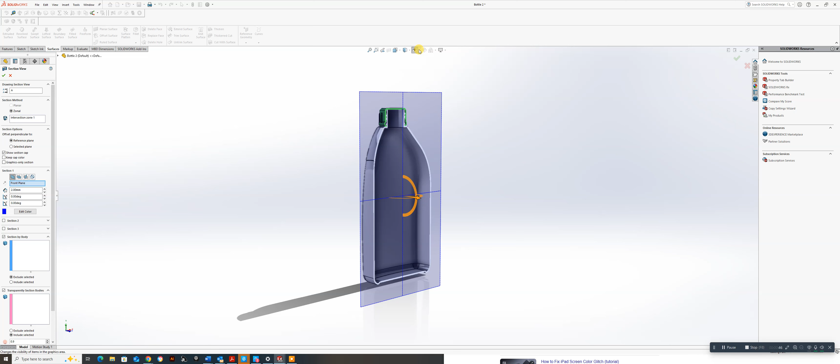Okay, let's just take that one off. Sorry, I want to take that off there. So how do we do this? Right, I'm going to start a new drawing. So just to demonstrate this, if I go to File, New, Part, and OK, so we can keep going back to this one to get sizes and stuff.

So as with everything, go to Sketch, Sketch, and I'm going to do this on the top plane. So I'm actually looking down on this, and the first thing I want to do is put a centre line in, around that origin, so from there to about there, and it should lock into that point there, which it has. And I'm going to put one up from about there to there.

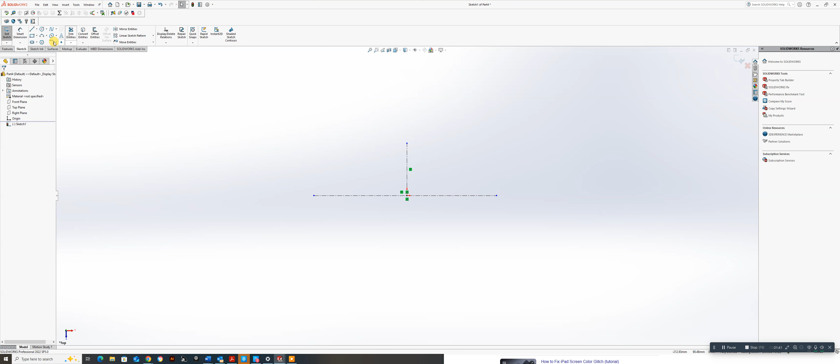Now I know what the distance right across is, it's 115, so I'm just going to put a smart dimension in for that line. Okay, and put 115. And this one here is 60 across, so I'm going to make this one 30. Not far off at all.

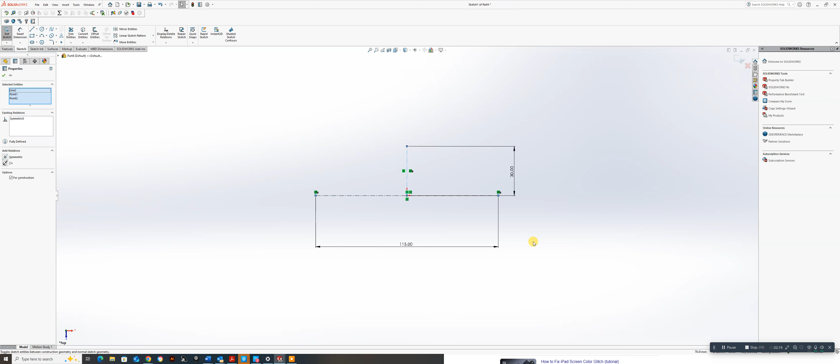Now what I need to do is select that little dot there, hold the control key down, select the centre - not the centre dot, come off that one. So we'll start again - that one there, centre line, and that end one, and then let's make those a symmetric condition. You see that move in. I don't need to worry about that one because of the other side.

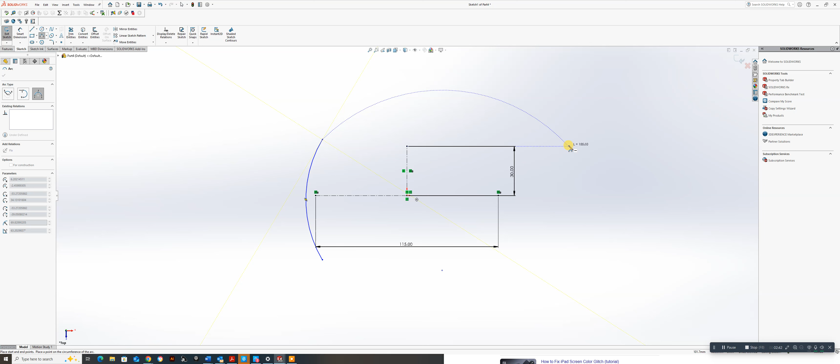So what I'm going to do now is go to my arc tool. I'm still in the sketch tool, I'm going to go to my arc tool. I'm just going to roughly do an arc from there to there and about there, and I'm going to do one from about there to over there and down to about there.

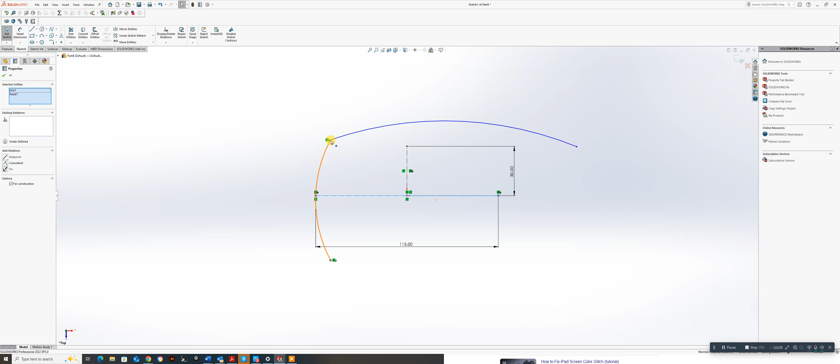So I'm going to make this one here, hold the shift key down and make those vertical together. They should be in line, and I'm going to bring that in and snap it to that point there, so it's on there. I should actually make these symmetrical - control key, do that, and there we got symmetrical there.

And then I want to bring this one in a little bit there. Let's bring this right down to here. Do that, let's make that. Oh no, Control Z - let's just bring this down here for a sec. That might help a little bit.

Let's see if I can bring this down to about there. And let's see if I can snap this one in too. Yes, I can - do that one there, coincident. There we go.

I'll bring this down a bit more. Right, I'm going to do that one and that one, I'm going to make those horizontal. It's changed everything - let's see if I can get out of this. Let's just pull that back a bit so it goes back to about there.

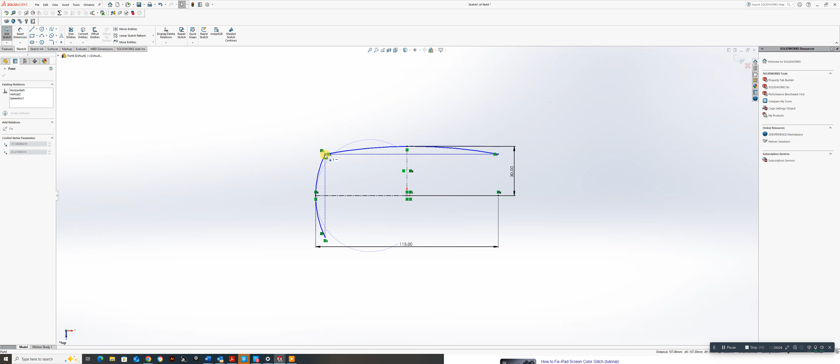That's perfect. And I'm going to mirror, or what I should do is make those symmetrical as well. That one, hold that there and there, make those two symmetric. Okay, we're now getting somewhere.

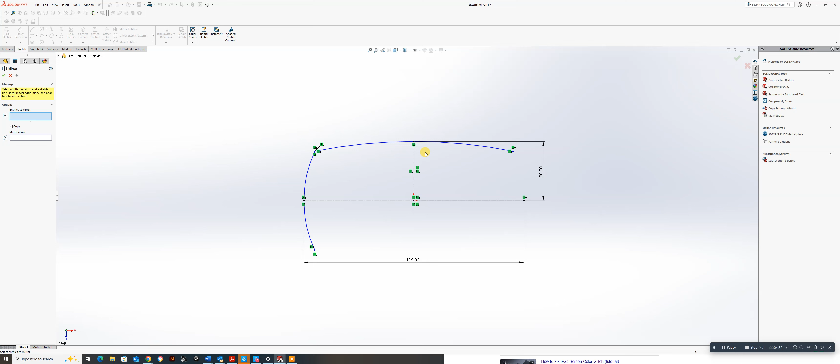And then I'm going to mirror, and notice I haven't put any dimensions on quite yet. I'm going to mirror that entity about there. Perfect, so just get that tick, and I'm going to do exactly the same again for the other aspect.

So mirror entities - I'm going to select that one there and do this one here. Sorry, no, I've done that wrong. Take that one out and put that one in there.

So I now have the bases of my bottle, but there are no dimensions strictly on there, so let's do that. Smart dimension, and this is a radius for this curve. Now that says 57, it should be a 112 radius. So let's just see what happens here.

It might have clicked on, so let's just try and change that to 112. Okay, that really does throw everything out. And let's bring this one in, see if I can put it down. No, I've done something really drastic there.

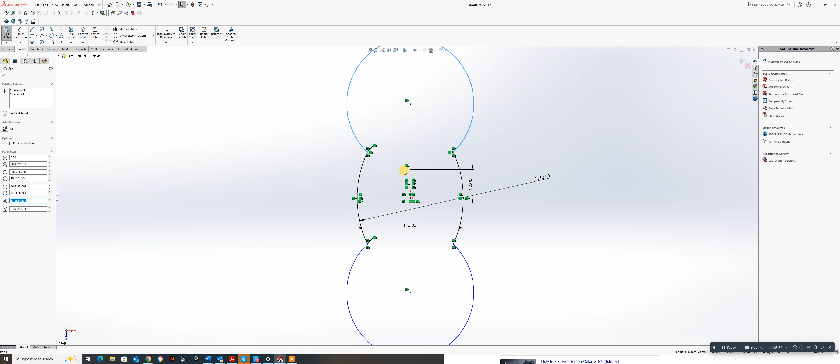So it's Control Z that - this is what it's about, it's trying to get yourself out of problems. I think it's because that has done itself in, so let's just do that first. Let's do this top one first. Smart dimensions, that one there. That's better. And let's do that one at 300.

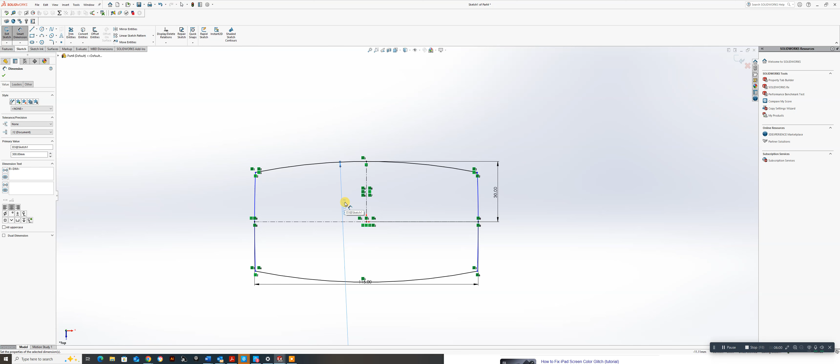Okay, all I need to do is now try and bring this in a little bit. So we've got a tiny curve. Let's go smart dimension again. Let's do that one, that's better, and do 112. There we go, far better. So I now have that.

And I need to do fillets on this side, so let's do those at 10mm. Let's go to my fillet tool, which is there on the sketch, 10mm. That looks about right. Go around, do all these.

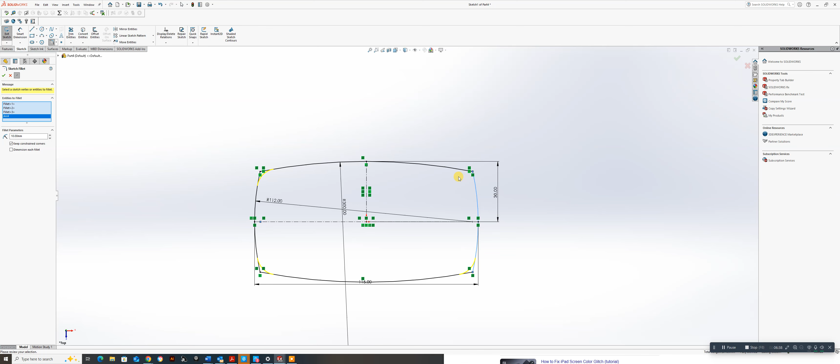And now I have the bases, the actual base of the bottle. If I just do that up there for that. Now what we need to do, if I bring back on the planes, I don't need to actually do the planes on that. Let me just agree to this. So up there, so I now have that sketch.

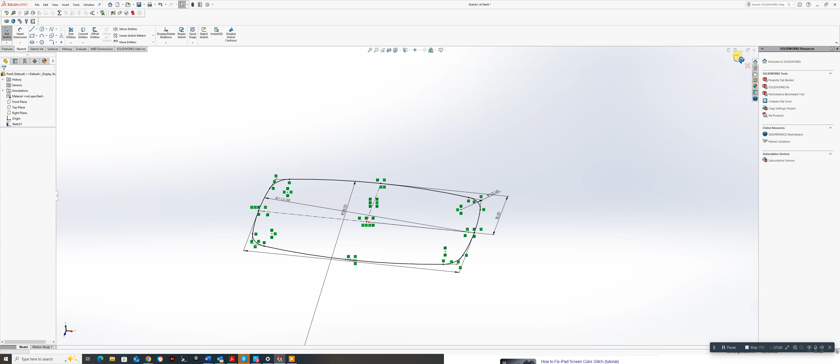Now I want to do another sketch further up. So if I go to features, reference geometry, then plane, and this time I want it 120 off this plane here.

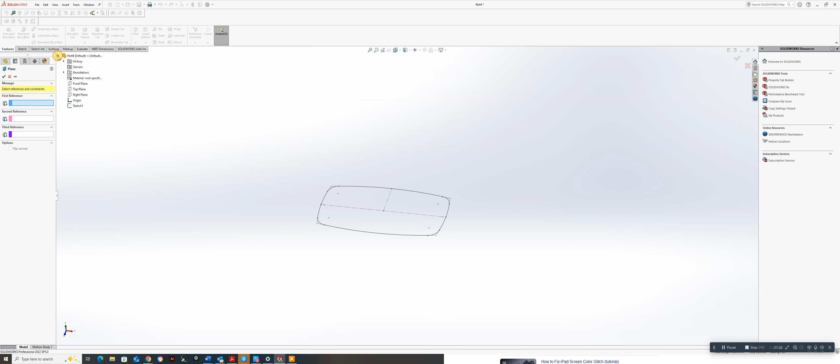So I need my reference geometry. Now rather than go up and switch my planes on, I'm going to do it from here. If I just hover over the front plane, I don't want that one. I go to top plane, and just show you the recent, the right plane. Go to top plane, and you see default was 10. I want that to be 120. Okay, let's give that a green tick.

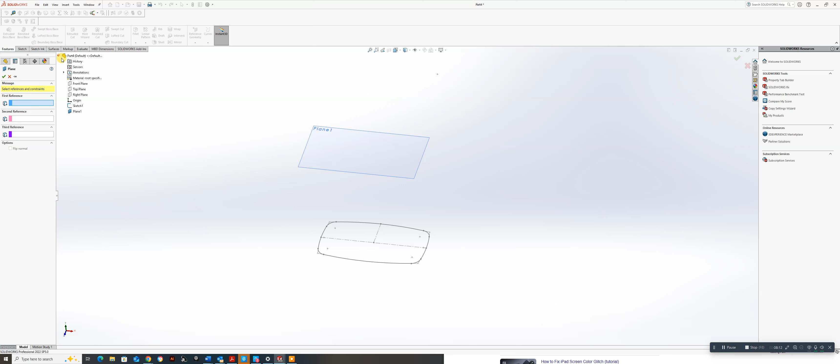And while we're here, I might as well do the next one as well. Put my planes in, I'll put another plane in, so just go to features. This is for the top of the bottle. Plane, and this one is not off that one, I'll do it from the base again, from top plane. Okay, and this time that should be 210. I could have done the maths, but I'm just a little bit lazy in that way. So just give that green tick.

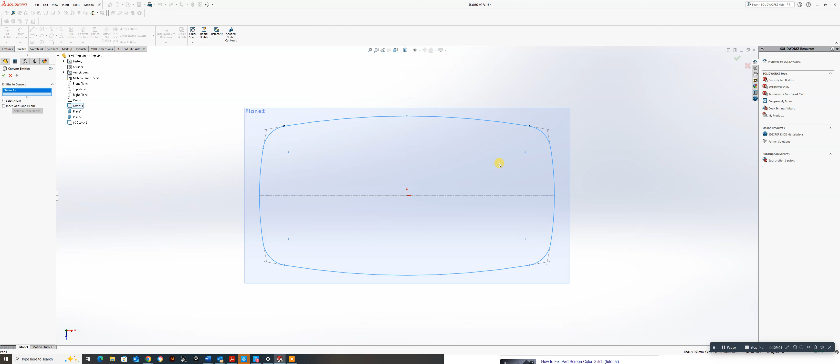So I've now got two planes that I want to put sketches onto, and it will come clear as to why in a second. So with this one here, I want to replicate that sketch onto there. So all I need to do is go to sketch, select plane 1, and go to convert entities, then just select the previous sketch. Now I can either do that by clicking on it, or I just go to sketch 1 - which it didn't like actually, forget that, just select the entities, that's it, that's fine. Convert entities, and you'll notice I now have a copy of that sketch in plane 1.

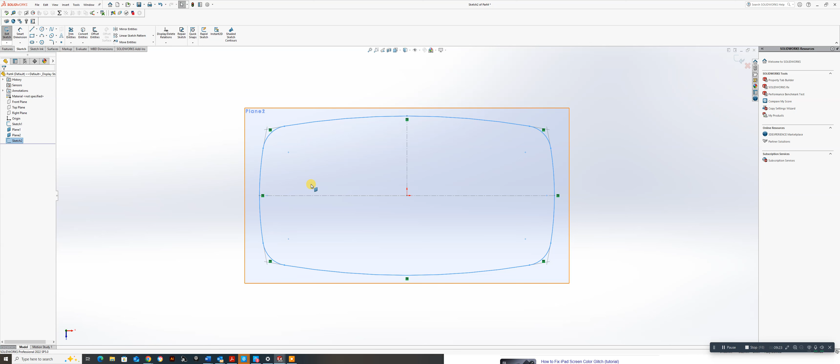Now, next sketch I want to do, so I just come out of this, is actually put the lid or the top of the bottle up here. So I'm going to this time go to sketch again. Okay, it's automatically selected my previous one, I don't want to do that. Just go to exit sketch, and what I'm going to do is just click on that plane, go to sketch, which it should do, and I want to draw a circle, and if it lets me, I want to do it on that line because that's my center line, about there, and I know that this circle is 45mm in diameter.

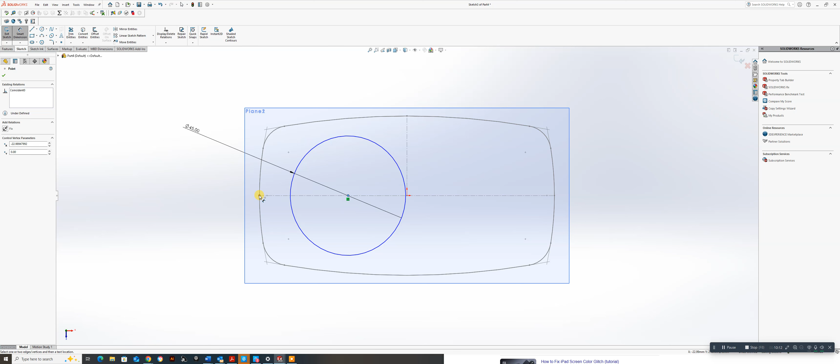There we go, and I will come in and I need to - sorry, I'm going to cough - I need to get that point from there to there, so I put in a dimension from there to there, and because I don't know that, I'll show you the other way you can correct this. And just agree to that for a minute.

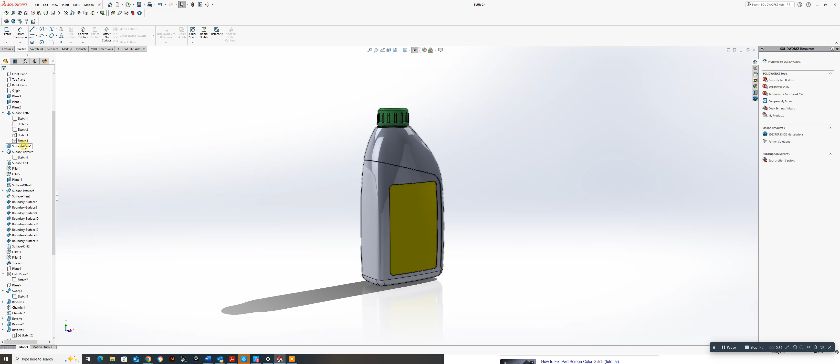If I use a control key and the tab bar, it goes to my previous drawings. So what I can do is actually now go into that sketch I had before. To do this, to go back in time, if I just right hand click over surface plane, it's not going to do it for me, is it? Okay, do it again, and I'm going to this roll back arrow, and you'll notice it's gone back to what we are actually creating now.

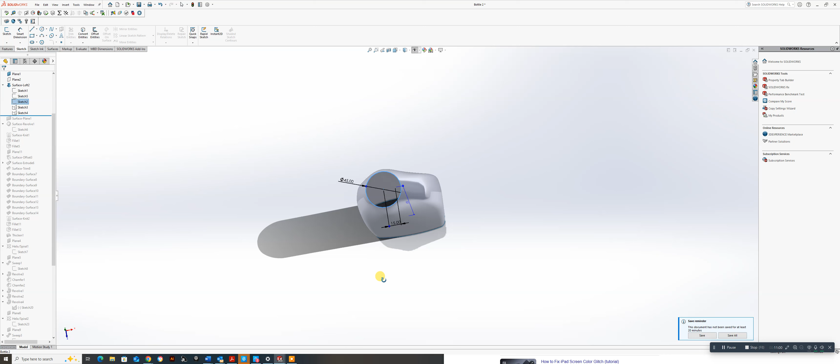So this is what we're creating by doing these sketches. So what I'm looking for is that top sketch on there, so that's that one there. I just clicked on it. It tells me there, it's 15 from the center. To make sure I know that, I just go into edit sketch, and you can see the dimension there is 15 mil from that center mark there.

So if I go to control and tab again, I can go back to my previous drawing. There we are, I've got 35 there. I'm just going to delete that and go back in and do the same again. So from there to there, that's 29, and actually I want 15.

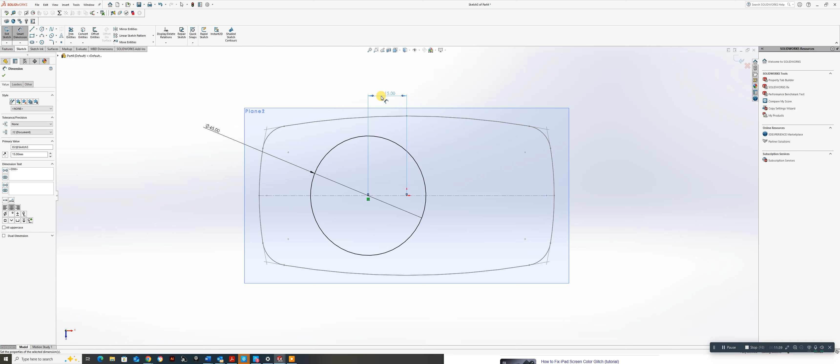I've got to double check that. I think I'm right, I may have got something else wrong here, but this is why I'm doing it. I'll go Control Tab. That's one thing in SolidWorks, you can't have two drawings open at the same time, which is a bit of a shame. If I come back into that, I'll actually see everything. So yes, I am right.

Actually, that's interesting, I've got center on there when it should actually be that center there. We'll see what happens, but at the moment it's correct. Part of the reason why this is a bit off, if you go onto this here, it's because I'm in perspective. That's why.

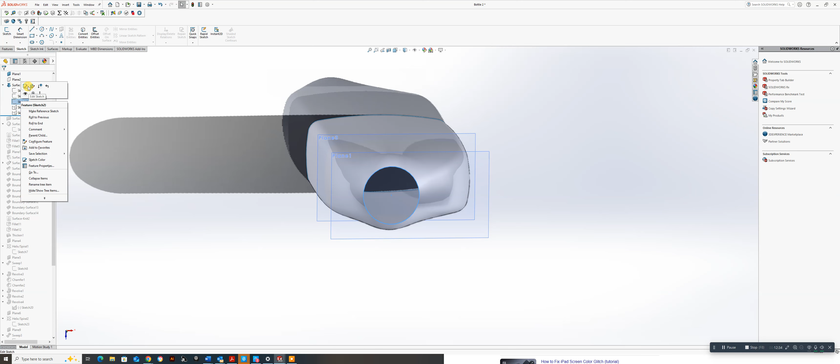Let me come out of that a second. If I go into that there, take perspective off. Okay, and go back to sketch 2. Let's go to edit sketch, and there you can see that's actually spot on from that, so you can see relatively where we are.

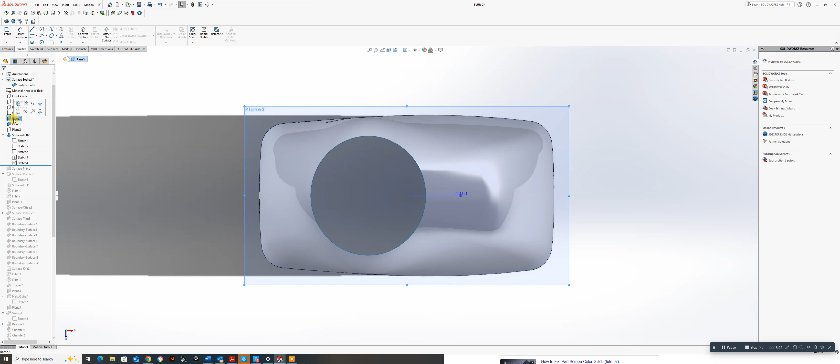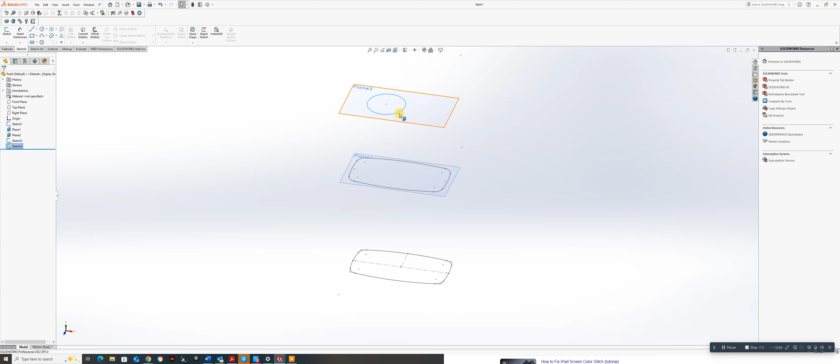Okay, let's go back to the main sketch and then I'll show you how to loft these parts. What I want to do now, I'll just leave it there, I want to take a skin from that profile to that profile to that profile. I'll show you that now, but there's something else I actually need to do before I do that.

If I go up here, if you don't have surfaces highlighted, just right hand click in here, go to tabs and make sure surfaces is ticked on there, and it will appear here. So I'm just going to go to surfaces.

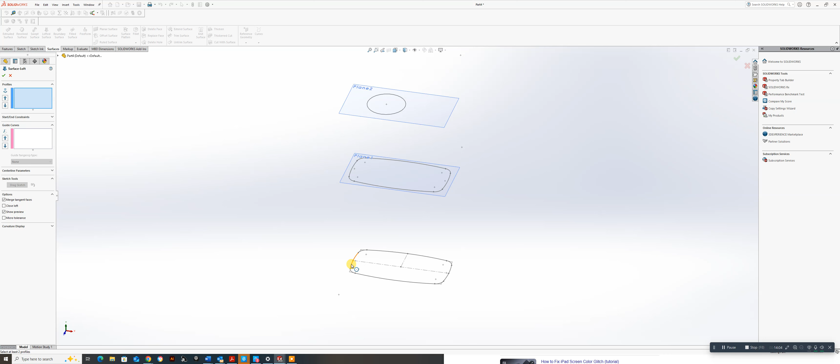Now just to show you loft, go loft surfaces, and it's asking me, it's got sketch 2, then I can do this either direction. I'm just going to clear that selection, and I'm going to click that bottom one there, and I'm going to do that one there, and you can see it's starting to put a skin on top of there, but it's a bit of a squashed up bottle.

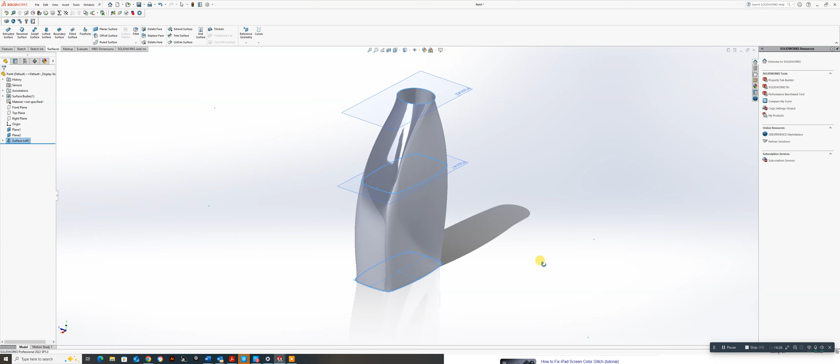If I just tick that, you can see that it's not quite conformed to what I'm after. There's sort of areas in here. Now you can put things like zebra stripes on and contour stripes just to see what's what. Although it doesn't look too bad, it just is not right. So what I need to do before I loft that, I need to put some constraint curves in as well.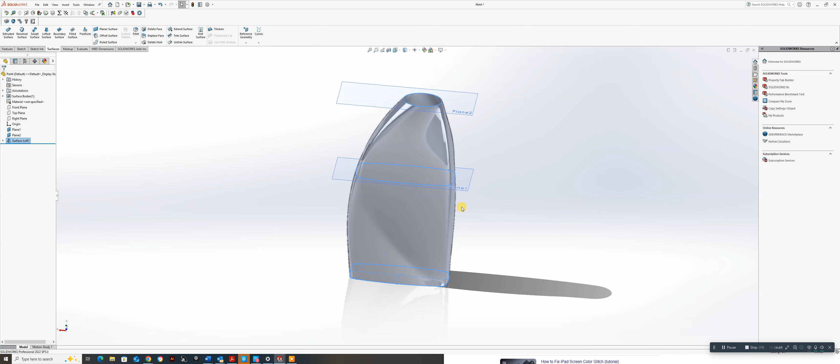Now, if we go back to my other drawing, if I just go Control Tab, okay, what you'll see is on here I have two other sketches. I have that sketch there, and if you note the dimensions from that, that is a 160 with a radius of 80, and I'll show you how to do that in a second.

And if I go to my second curve, the other one, if you see this curve, let me just go in, I've done curving to that. If I go to edit sketch, you'll see it a little bit more clearly. I have a one of 120 and a line going up, and I'll show you that in a second. It's a little bit by eye for this, but it will come clear.

If you want to know the dimension of that, I can go to my little tape measure, just click on that one, and it tells me a length of 149.34. The reason it's a little bit odd is because I've got a tangential relationship with it there and to there for this. It's not 120, it's 102 in there. So let's just come out of that.

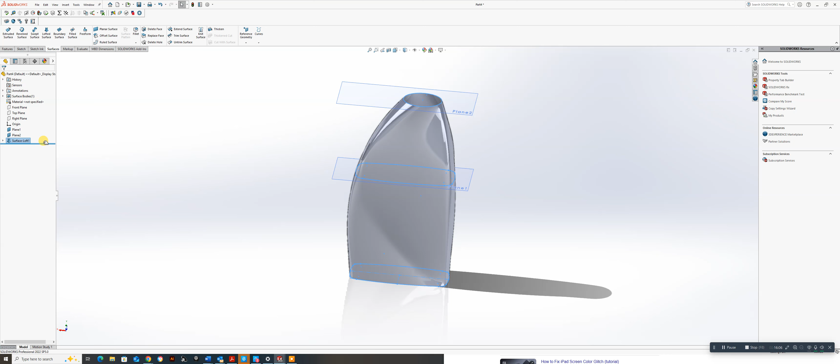Okay, I'm going to go Control Tab, I'm going to go back to my drawing we're doing at the moment. I'm going to pull that up to there. So I'm not going to pull that up to there, I'm actually going to delete that surface loft. It's easier to do that than try and sort other things out.

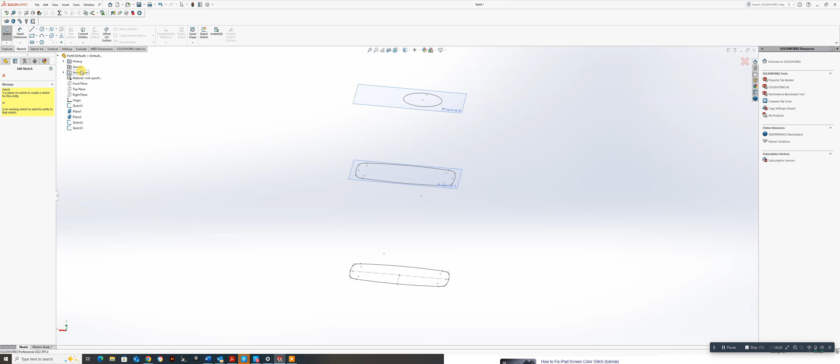So I'm going to go to Sketch, and I'm going to pick another plane to do these side sketches in. Let's go to that plane there. Okay, and I'm going to just roughly sketch from about there to about there, and then I'm going to press the A button on the keyboard, because that allows me then to do that.

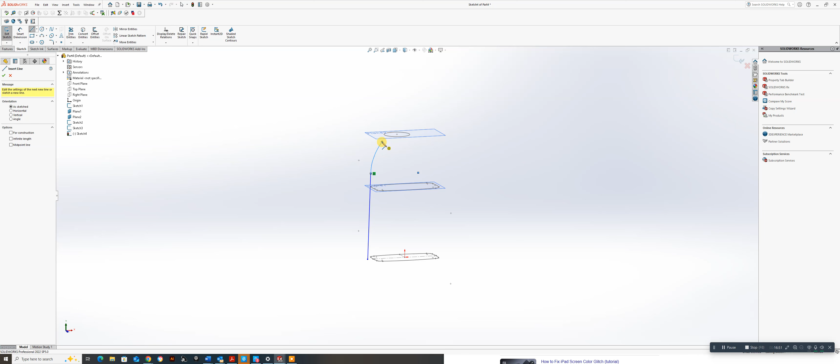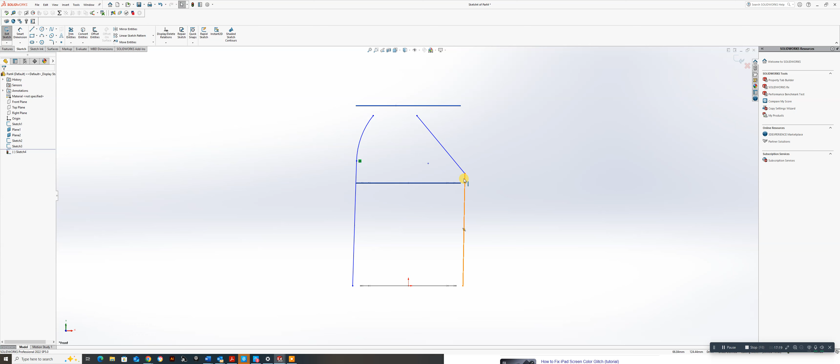I'll do that again in a second. So I'm just going to leave that, this is just roughly on that. And I'm going to do the same again the other side. So I'm going to do a sketch from about there to, actually this is slightly different, to about there. I'm then going to do actually up to about there, because that there I did something slightly different with. So let's just sort this side out first.

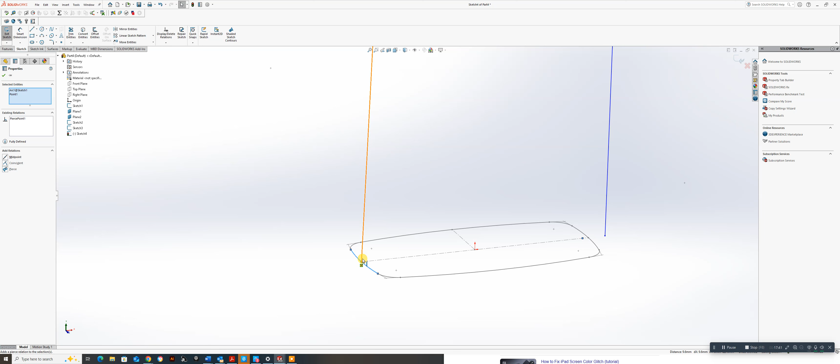Click on it, hold the Control key down, and select the line, not the point. Press the line, let go. What you want to look for is not 'make coincident,' because it won't actually go to it. You want to use the Pierce command. You see it jump in, and it's absolutely on the line. I'm going to do the same at the top, get that green tick. Hold the Control key down, go to the circle, and use the Pierce command again. So now I have a line there.

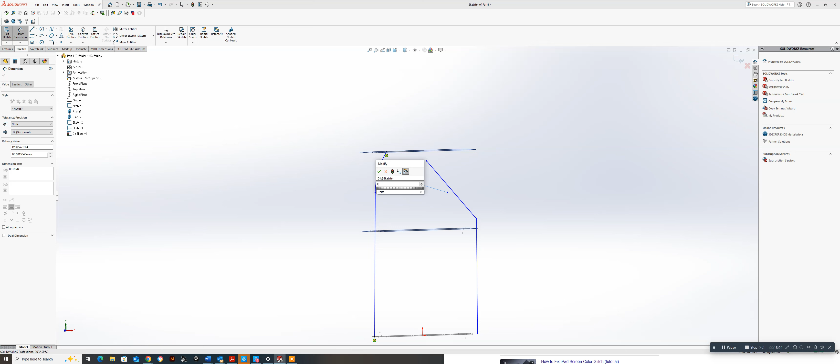I'm going to put a smart dimension on that of 120. You saw that move down. I'm also going to put a horizontal constraint on there. So we are now done automatically on that one.

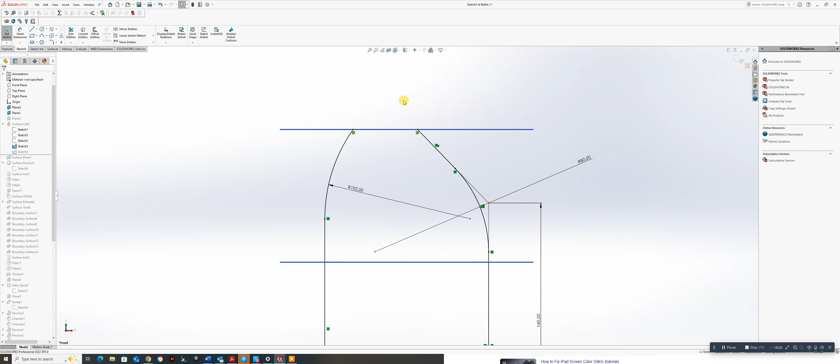Now for this one, I'm going to flip back to that sketch and see what I did on the other side. Let me Control Tab to that sketch. So I've actually got a fillet of 80, then a straight line. If I go back into that, you'll see I've got a straight line there, and a fillet with a radius of 80, and a centre point up there at 140. So I want to replicate that.

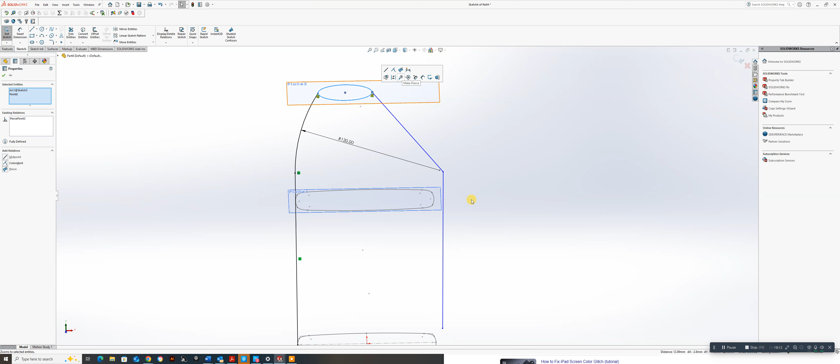Before I do anything, I'm going to go onto that point there. I'll hold Control and select the circle, and pierce that relationship. I'll do the same down the bottom here - clicked away to confirm it. Control onto that one there, and then do that there. So I've got a pierced relationship there.

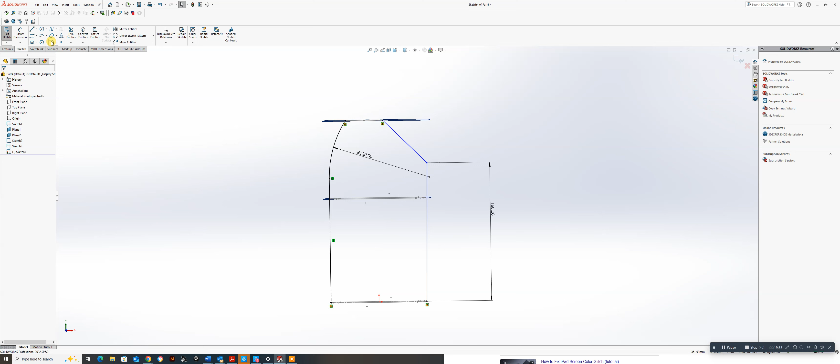To put some dimensions in, I'm going to do that one - there we go, at 140. And there we go up. Then I'm going to go to my sketch fillet tool, and I think it was 80. Put that in there, then select that one and this one here, and it's giving me that there.

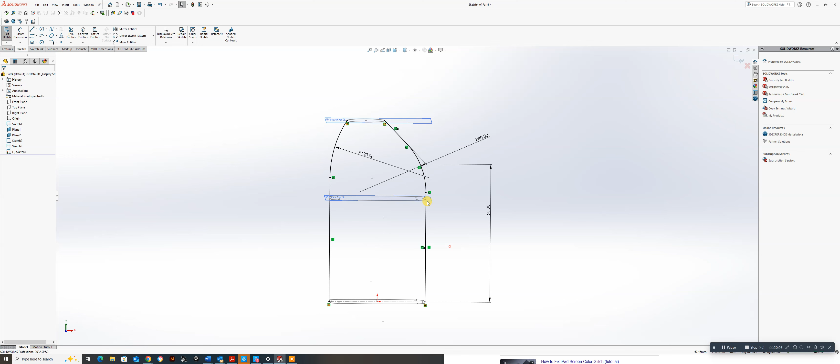Now what I should do, if you notice, I need to make that horizontal. Let's click on it, make it horizontal, and you can see it's now come into that point. Let's just see if this will work - hold the control key down on there - no, there's no relationship needed because it's actually in line as well. So I've done that one.

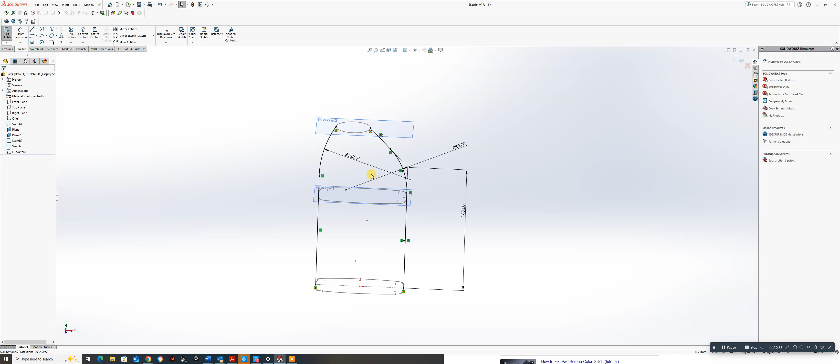I now need to do the sides, but I need to put an additional plane in, and it needs to go through that centre so we actually get some nice sides going. You could put other guidelines in, as many as you like, to try and get it accurate, but for the moment we just need 4 guidelines.

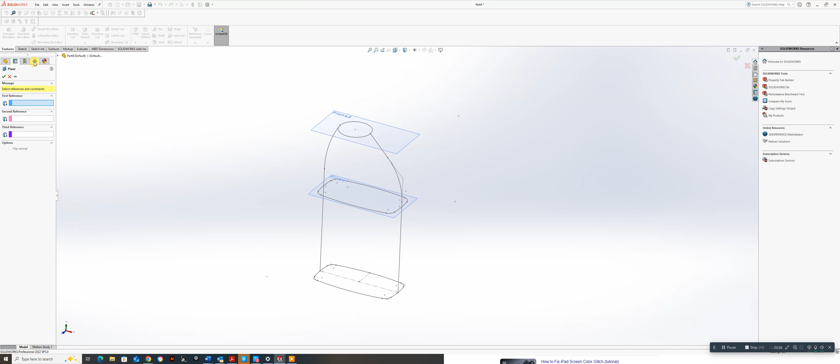Come out of that sketch for a second, go to Features, go to Reference Geometry, go to Plane, and this time I'm going to click that centre circle. Actually, let me bring my planes up - oh no, I don't need to. I want to come off that plane, but I don't really want to select that first. I'll show you why - if I select that first it does that, and if I then go to the point I want, oh, it's done it. Just be careful, sometimes these can be a bit funny. You normally have to select the point first, then the plane, but it seems to have worked this time.

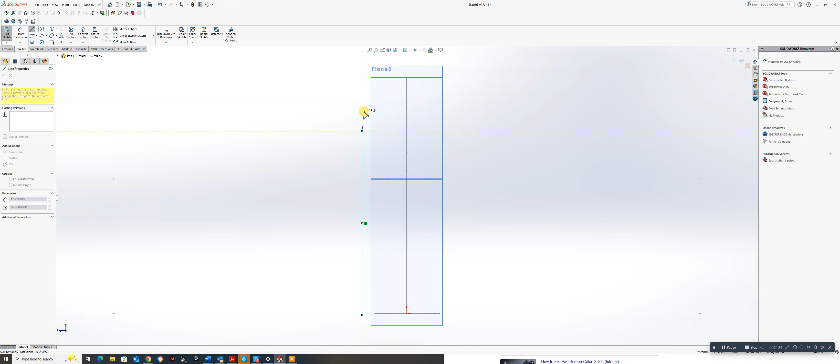So this is the plane I actually want to draw in. There we go again, so again I'm going to do a sketch. Sorry, I've just done that, and I'm going to draw a line up. Again this is going to be rough, so I'm going from there up to about there, and again I'm going to press the A key, and I'm just going to put something in about there.

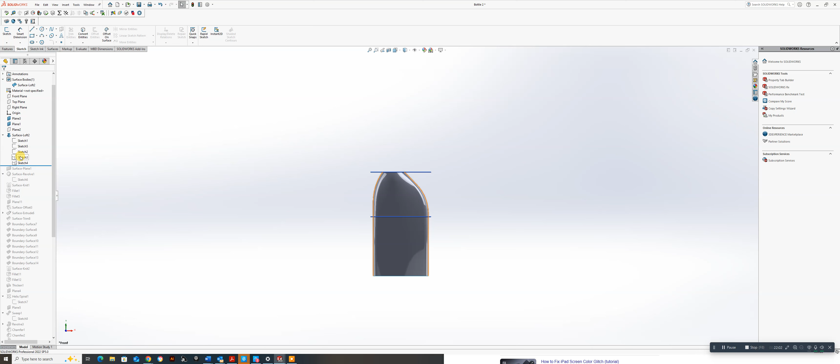Now because these are going to be symmetrical, I only need to do it once, but I've forgotten what the sketch is. So if I go Control Tab and go to the side - I need to come out of that one. This is the original drawing, by the way, just to make sure. I need to go to the last one there, go to Edit Sketch, and it's 34 degrees. Let's see if we can do that - that looks about right. Okay, let's go Control Tab, back to the drawing we're doing now.

So this is the drawing. Let's put a radius in for that at the moment - let's just put in 34.

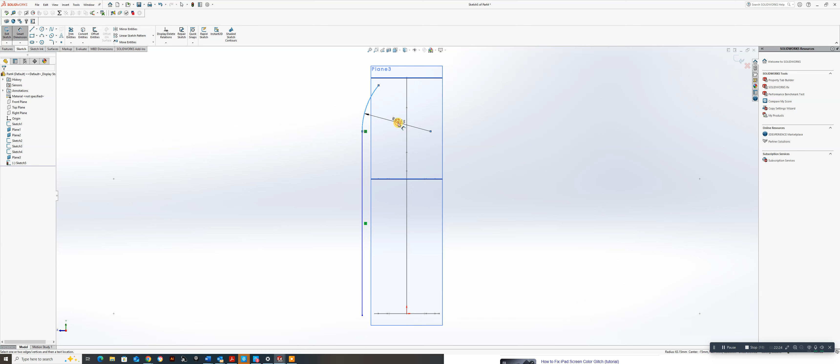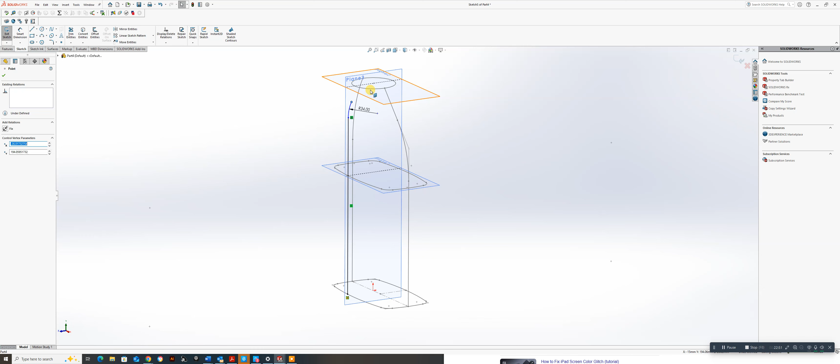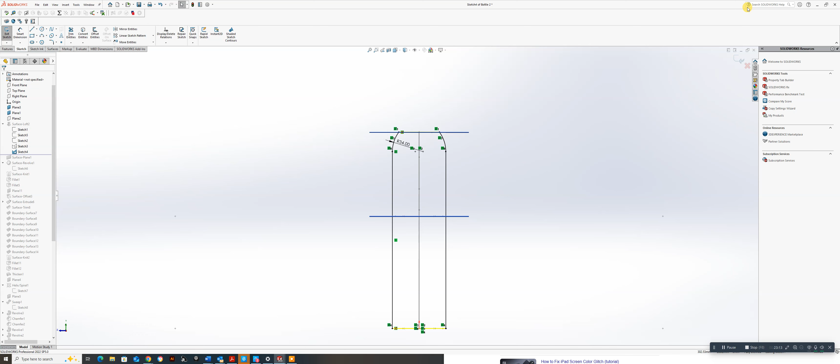Okay, that's better. Let's get this Pierce relationship going. I'll take this 1 point and put it onto the line, and do the Pierce relationship. Now I'm going to pull this one up, and you notice it goes with me, because I've still got that selected. Control Tab and Pierce relationship so we can see it. That doesn't look quite right, but I'm sure it is, if I've got the right dimensions I talked about. Let me just check again - Control Tab. Yeah, it is fine, it looks all right. I'll click that one.

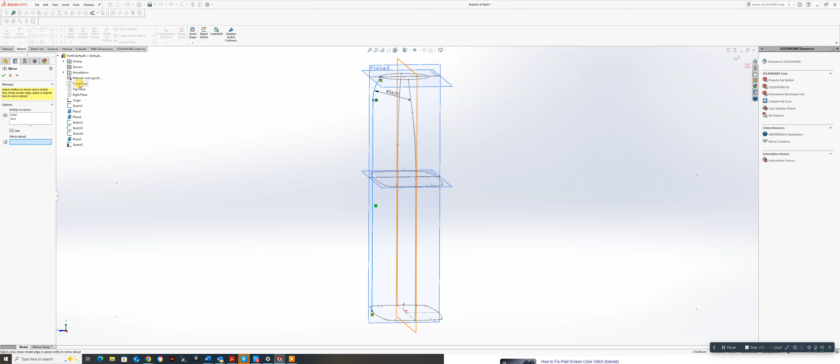Now I'm going to mirror that one over to the other side. Go to Mirror Entities, Entities to Mirror - I want that and that. Mirror about - now I can use the plane, which is the front plane. No, I can't use the front plane, it doesn't work like that. Yes it does now, okay, we've got it. Go across. So now I have a sort of skeleton for the bottom I want to do.

I'm going to switch off those, come out of that, and hide those 2 planes. As I said before, sorry it was a late night. I'm just going to click in on these and hide those planes - I don't actually want to see those - and I'm going to hide plane 3 as well. So now you've got the bare bones of the sketch.

So let's put some skin on this. Let's go to our surface button - it's already greyed out stuff that I can't use, and highlighted stuff I can use. For this one I want to go to Loft Surfaces. Loft is a really good one, it's an old term from boat building where you put sections in, then strips of wood across - it's called lofting. Exactly the same principles. So click on the loft, and it's going to ask me for the profiles I want to loft between.

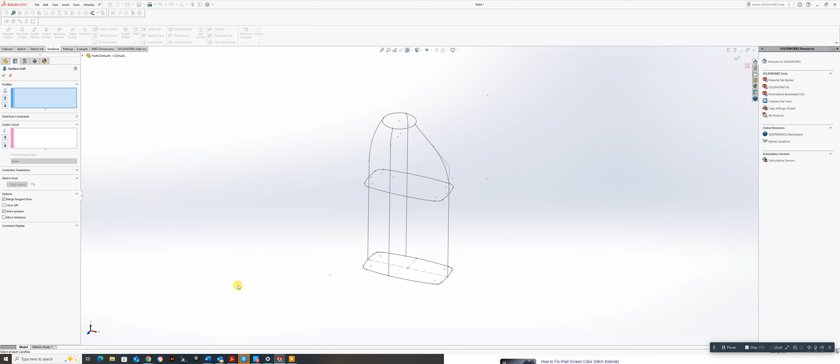I'm going to click the bottom profile, and you notice it's all gone blue. Happy with that. I'll do that second profile, as we did before, and do that profile there. Now if you look carefully, you can see it hasn't actually conformed to the guide curves, so I need to add those guide curves in.

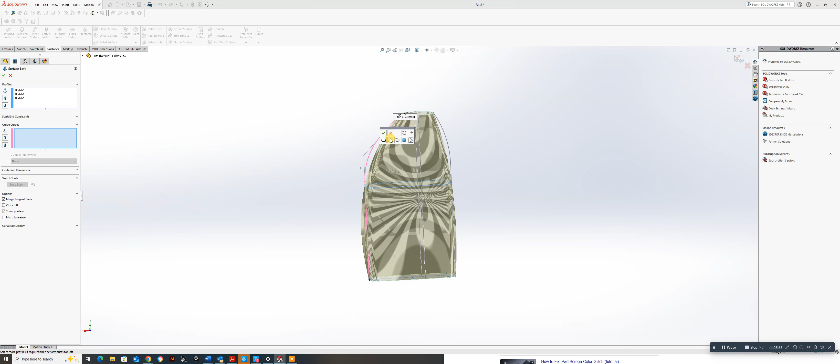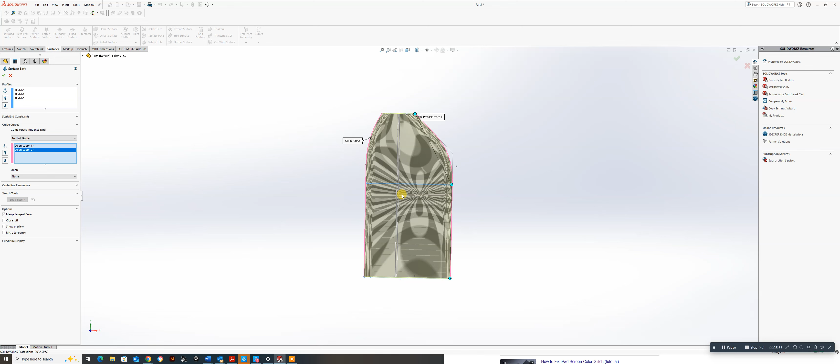I'm going to go from the blue box to the pink box, click on the pink box, and click that there. It comes up this little box with a squiggly line - it's not a loop, so I'll click green. You see it automatically pulled in, and it's made a really funky shape there - that could be a laundry liquid wash bottle, that'd be really nice to do, but I don't want that. So I'll click on that second one, give it a green tick, and you see it's pulled it in. Wish I could do that with my stomach, but there we go.

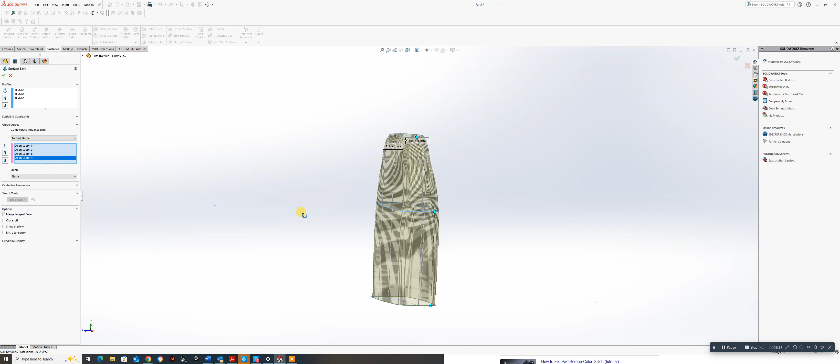Now I want to do the side bits as well, so I'll click on that top one. Okay, give it green, and I'll just do the last one, and that's fine. I'm just having a quick look, and you still have the zebra stripes on there - these show the light deflections, like if you're in a light room - but I'm actually quite happy with that. I don't mind that little bulge out there compared to the back, but you can put other profiles in to get that a little bit tighter. This is actually an oil bottle though, so I'm happy with that.

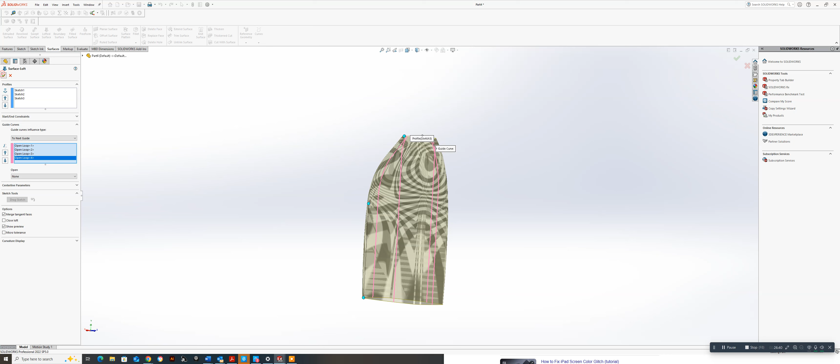I'm going to give that a green tick, and you can now see I have the shape that I want to play with. Also notice up here you now have a surface bodies folder, not a solid bodies folder - a surface bodies on that. Don't forget to save, which I'll do here - File Save. I have to do a save as on here - let's save this one as bottle demo.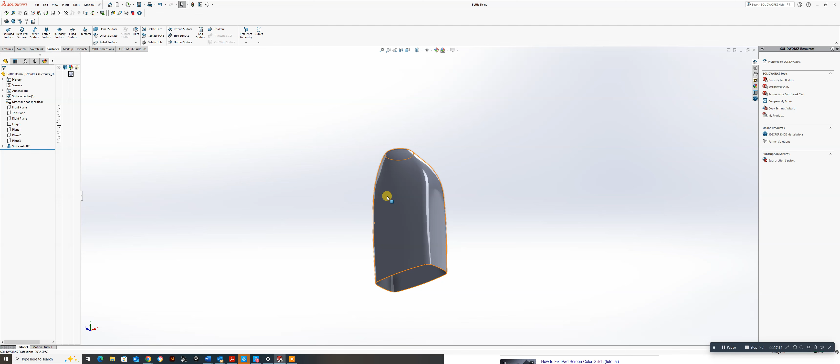Okay, so we've got our skin. Now before we stop for a little break, I'm going to put a bottom on this, still in my surface menu. I can use either a planar surface or a boundary surface. The easiest one is a planar surface, so just click on it, and it's looking for boundary entities, which is what this is because it's a plane. I click on it, and automatically it's filled in, so just give that a green tick. I now have a bottom surface there.

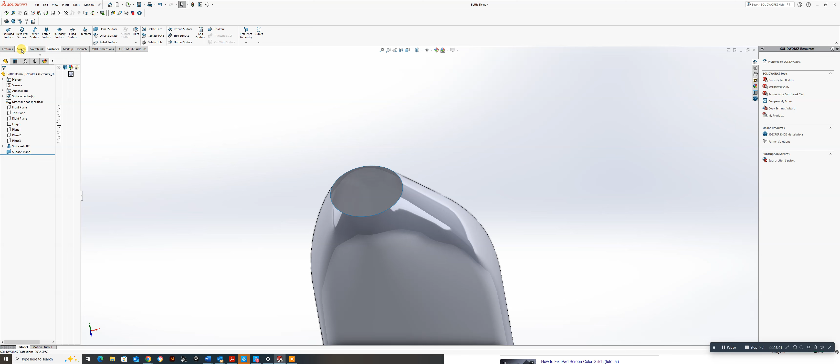We need to do something with the top, but slightly different. So I'm going to do another sketch first, in the front plane, just a rough sketch. This is the neck of the bottle, so I go down here and along there. I click on there, hold the control key down, do that there, and use the pierce command, which drops me down. Now I know there should be 5mm.

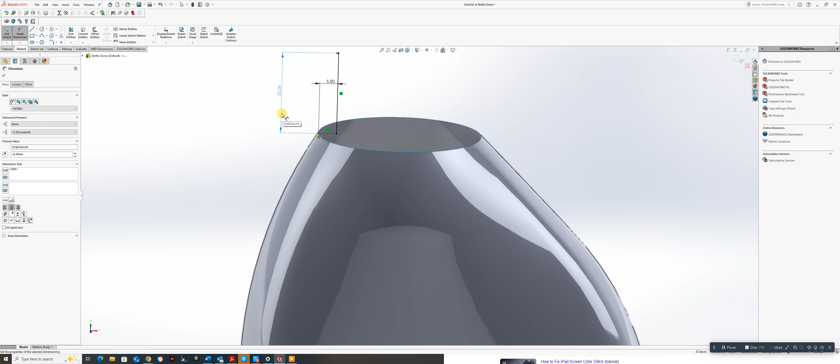That goes in, and I've got this. Good thing about SolidWorks is we can go back and change this. I've got that at 22 - you'll see why. Now that looks quite high, but trust me, it's correct for what we're doing.

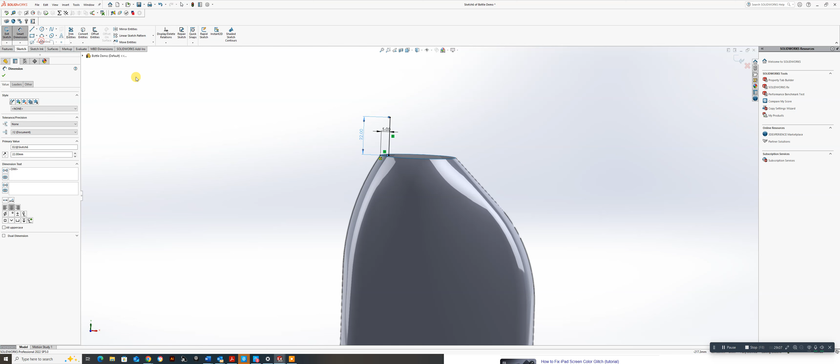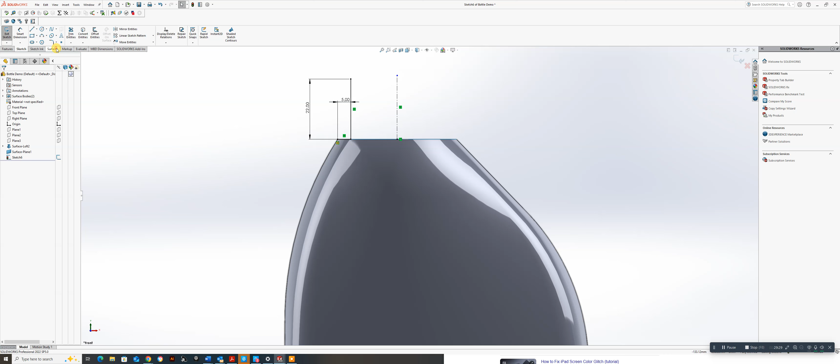I'm going back to surfaces, and even though I'm still in the sketch, before that I need to put a centre line in, roughly straight up, and I need to make sure I get it in centre. So I click on there, hold the control key down, let go, then make that midpoint, and it drops down. Back into surfaces, I go to revolve surface.

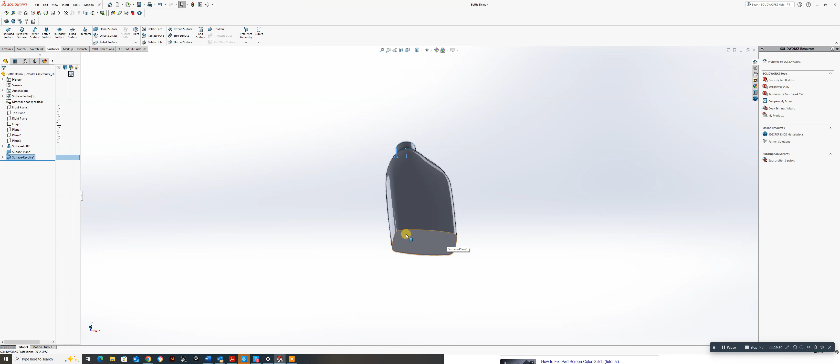It knows what I'm working on, so it's already done it, give that a green tick, and I now have the skin of my bottle. There's something else we need to do, a little more complex, which I'll do in the next video - put a little detent in here before we thicken that surface. But if you wanted to keep it as is, before any fillets, I'll demonstrate that.

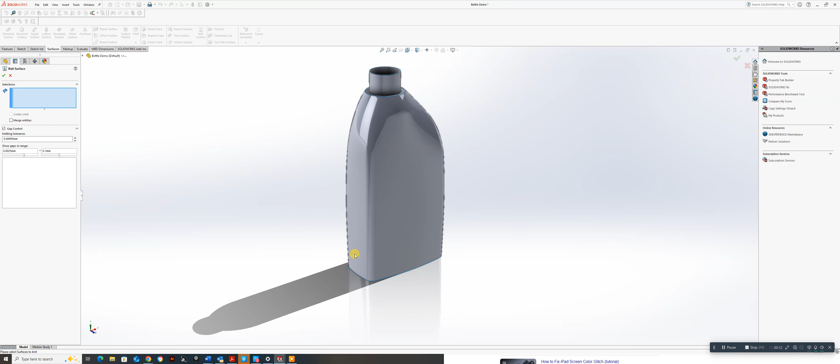I'm going to go into perspective because it always looks better, it looks more real. I'm going up to knit surface, and I'm just going to select all of this, up top - I thought I could pull a window over, and also the bottom bit. I don't know if that's done it - no, I need to add that back in. That one there. I want to merge entities, so all this is doing is knitting that surface together.

You notice now I've got - well I didn't show you before - if I go back in, I've got 3 surface bodies. When I knit it, it knits it into one. So it's still not a solid body, it's still a surface, but we'll go into that.

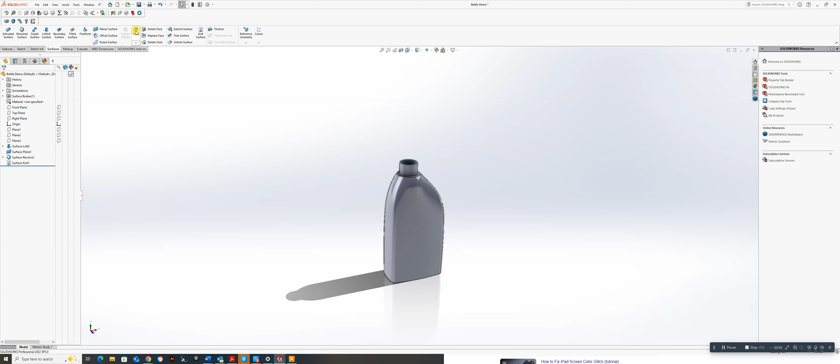What I can do now is go to surfaces, go to the fillet tool, and put a 10mm fillet on the bottom there. You can see if I put full preview in, that's what I would get. I actually want that to be 8mm, so let's change that to 8, and the top one I'll put in 8 at the moment.

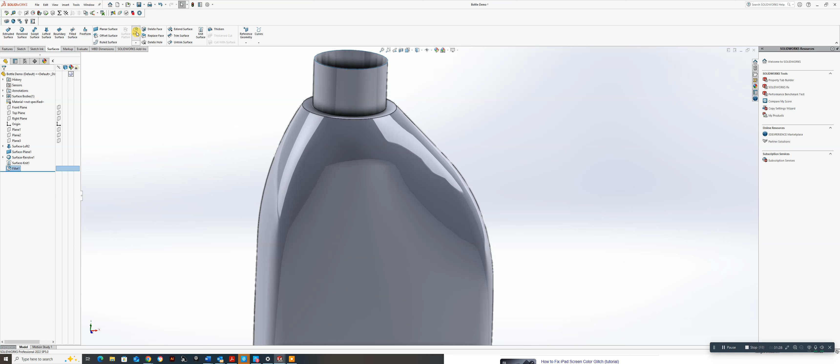I can try - let's come out of this and just put another fillet in. Where's my fillet tool? There we go, again it says fillet tool. Let's put this down at 4, a smaller fillet. You'll understand why later on when we get there.

So now I've got a nice shaped bottle on there, but I've got no depth to it. If I go to the section tool, you'll see that it's just paper thin - there's no body to that whatsoever.

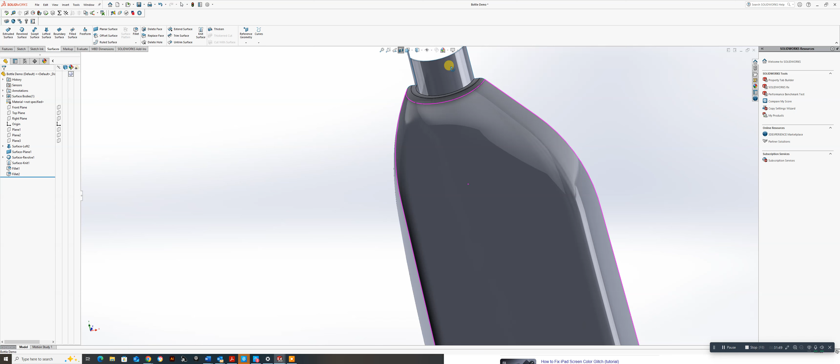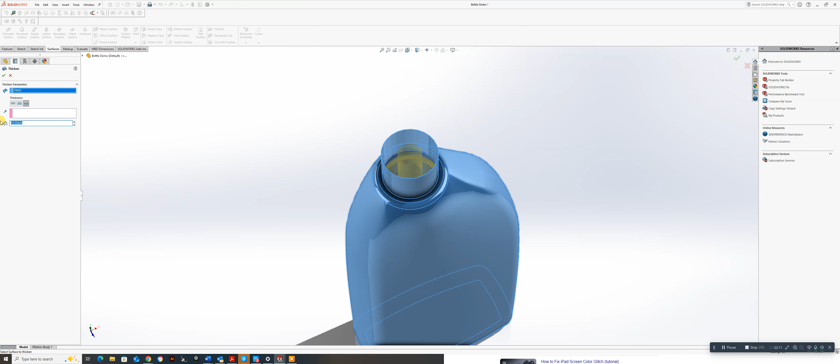Okay, I'll give you some thickness just to tease you a little bit. Just come out of that - if I go to thicken, it says thicken parameters. Go to that there. Now you'll notice default's 10, so it's actually gone very small in there. I only want this at 2mm, and if I give that a green tick, you can see I now have a thick bottle, and I've lost my surfaces folder - it's now gone to a solid bodies folder.

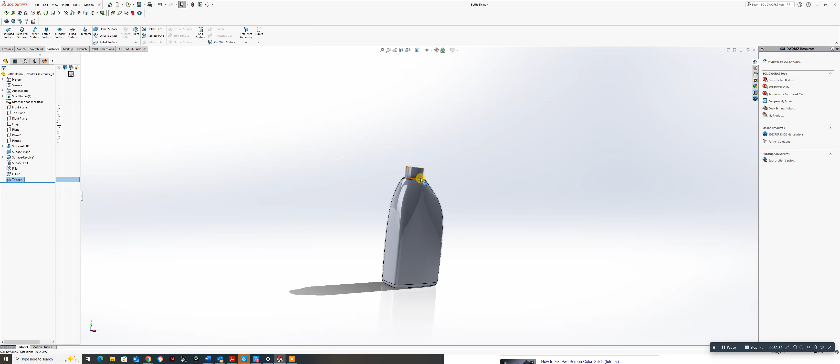So in the next video we'll backtrack a little because I want to put a space in here, and we actually want to put some threads in here later on, and we want to draw the cap as well. But that is the basics of the bottle. If you get that far, I'll be more than happy. If you want to continue with the other videos, I'll demonstrate how to put the other bits and pieces on there. Excellent, all right, we'll see you in the next one.